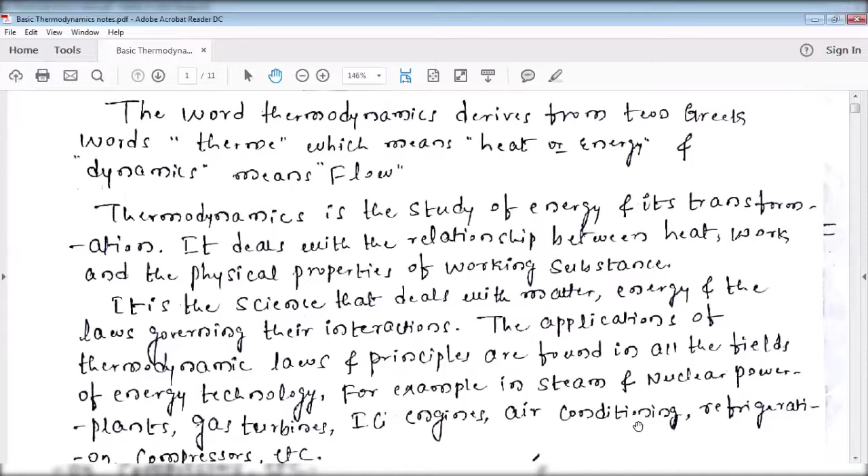In the air conditioning systems, what we are using is, here we are extracting the heat from the room to be cooled, then we are sending that heat to the atmosphere. Continuously we are extracting the heat from the room to be cooled and sending it to the atmosphere. Like this, by using thermodynamics in the air conditioning systems.

Then next example is refrigeration. In the refrigeration also, continuously we are extracting the heat from the substance to be cooled, that is inside the compartment, and that heat is sent into the atmosphere. Next is compressors. In the compressors also we are using thermodynamic systems.

Thermodynamic systems. These are the examples of thermodynamics. Many examples are there, many devices are there. All those devices come under thermodynamics. If you consider a boiler, that boiler comes under thermodynamics. That is one system.

If you consider a turbine, that is one system that comes under thermodynamics. It is a device which converts an available form of energy into mechanical energy. Again, that mechanical energy in turn gets converted into electrical energy. This is some introduction regarding thermodynamics.

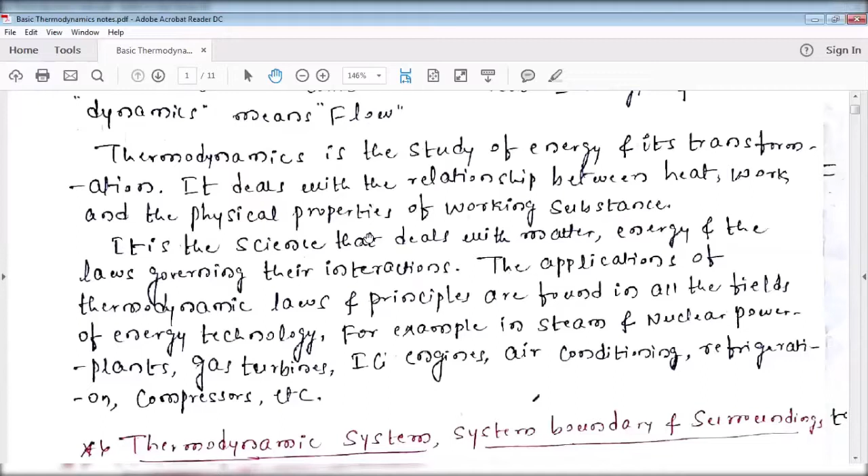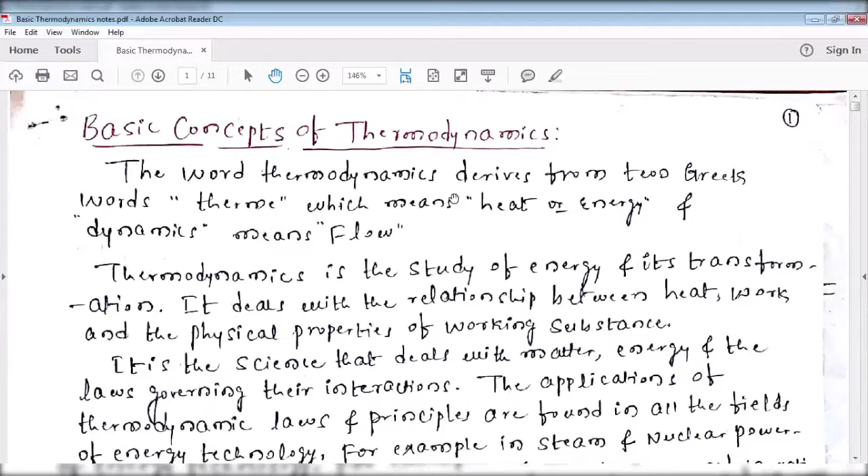In the examination, if they ask what is thermodynamics and to briefly explain it, we should write what thermodynamics is. Thermodynamics is divided into two words: one is therme and the second one is dynamics. Therme means heat or energy, and dynamics means flow. That energy flow or heat transfer is called thermodynamics. After that, write the applications of thermodynamics. I hope it's clear to you.

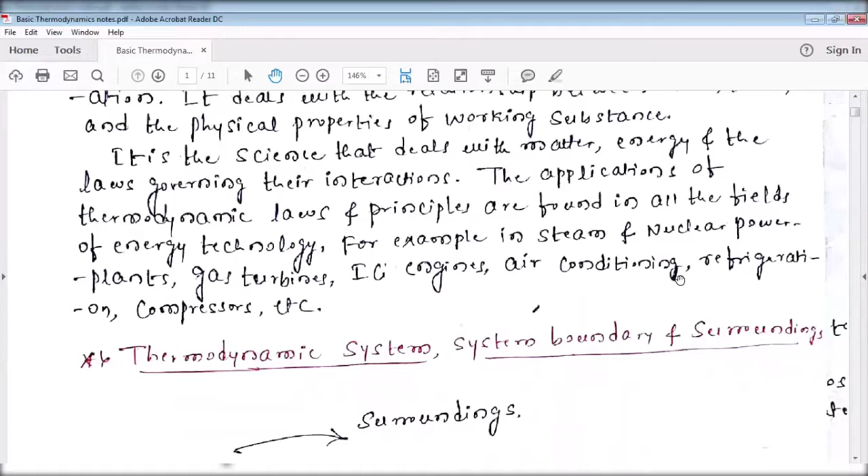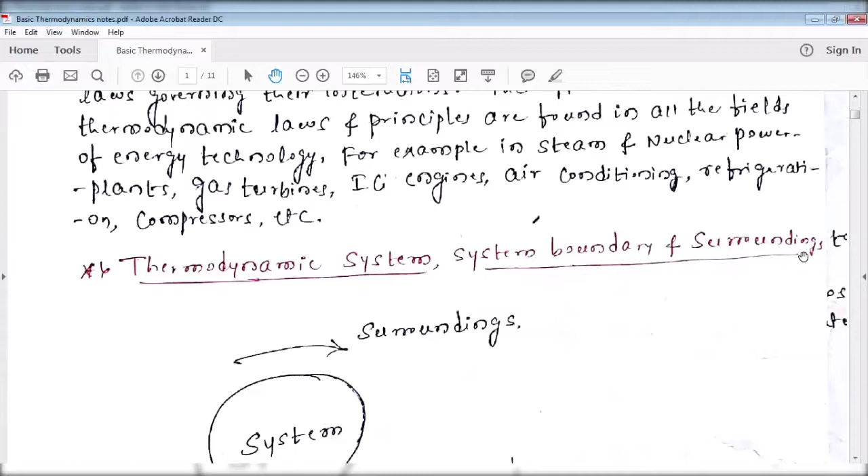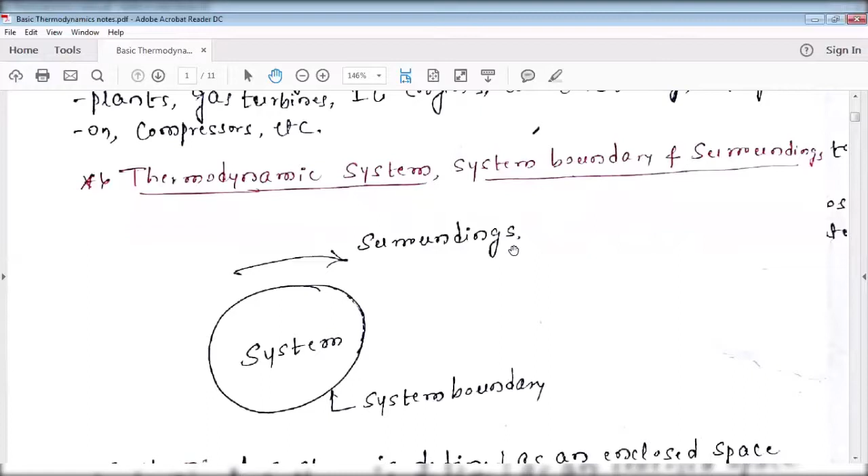Next is a very important topic: thermodynamic system, system boundary and surroundings. First, you should know what is a system, what is a system boundary, and what are surroundings. This is a very important concept, already studied in your first PUC. First, we are going to the system. Just go through the definition.

A system is defined as an enclosed space which has been separated for the purpose of analysis, observation, and inference. This is one system, an enclosed space separated for the purpose of analysis. If you want to do any analysis, observations, inference, or any research work in this space, you can perform it. Such a space is called a system.

The best example for a system is your IC engine. The IC engine is one system. Other examples are a refrigerator and an air conditioning system; each is one system. The next example is a boiler, that is one system. The next example is a turbine, that is one system.

Your mobile is one system. Your laptop is one system. Your classroom is one system. If you consider any device, that comes under one system. In your classroom, if I am using a projector, that projector is also one system. Understood? I hope it's clear to you.

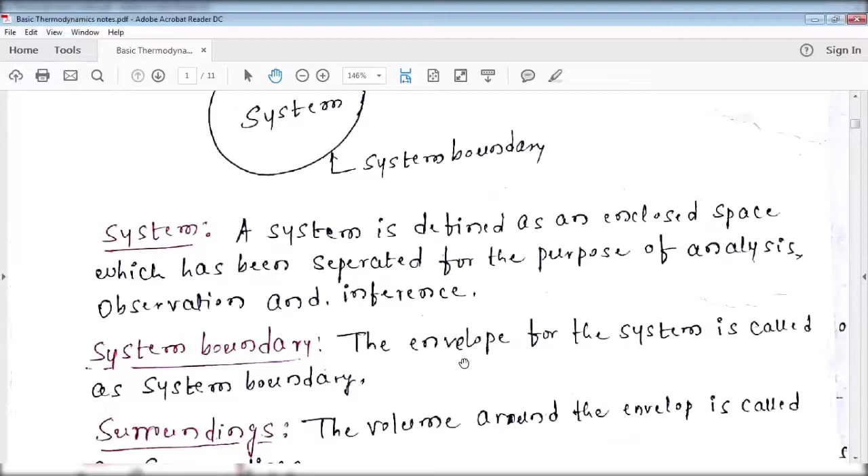Next is system boundary. Go through the definition. The envelope for the system is called the system boundary. Whatever the system is, that system is covered, and that covering envelope is called the system boundary. This is a system, the system is covered, and that cover is called the system boundary.

The best example for a system boundary is your mobile. For that mobile, you are using a cover for safety purposes. If the mobile is a system, whatever cover you are using is the system boundary. If you consider your laptop, you are using a cover for it. Here the laptop is a system, and that cover is the system boundary.

If your classroom is a system, four walls are there. Those four walls are the system boundary. If you consider your IC engine, the space inside the cylinder is the system, and the cover, that is the cylinder outer surface, is called the system boundary. I hope it's clear to you.

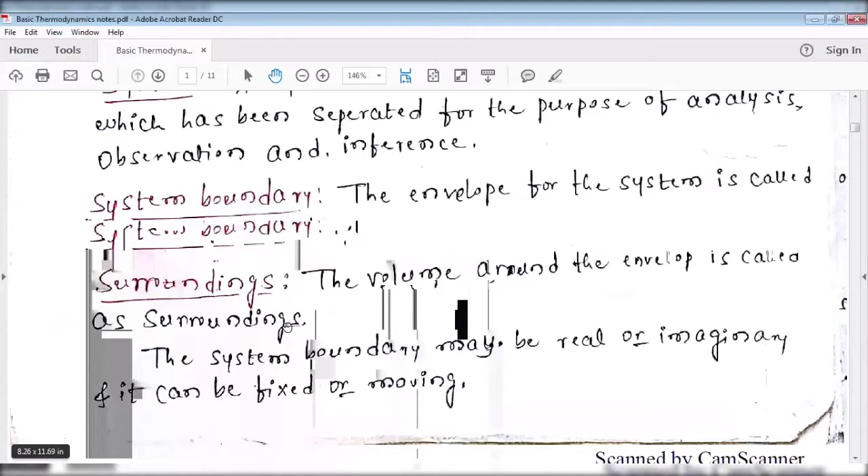Next is surroundings. This is very important. Go through the definition. The volume around the envelope is called the surroundings. Go through the figure here. This is the system. The system is covered by an envelope, called the system boundary. Whatever space is outside the system boundary, all that space is called the surroundings.

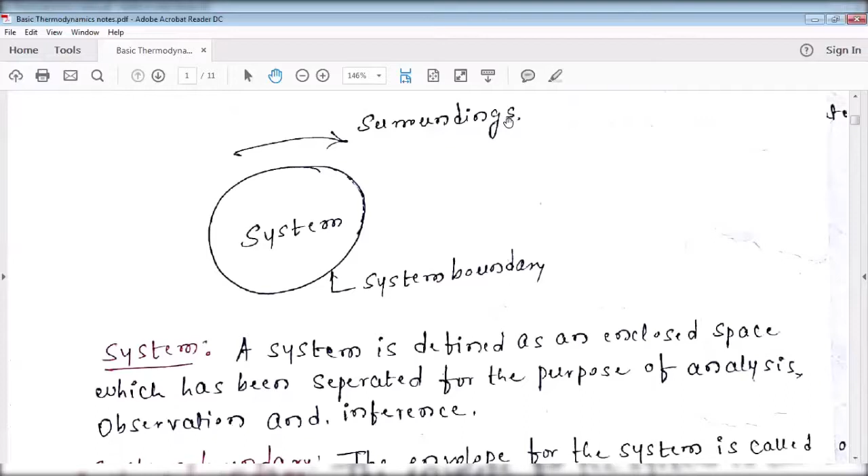If you consider your classroom as a system, that classroom is covered by four walls. Whatever space is there outside the four walls, all that space comes under the surroundings. If you consider your mobile as one system.

Yes, your mobile is covered by a cover, that is called a system boundary. Whatever the space is there outside the cover, all the space comes under the surroundings. Whatever it is, either 1 kilometer, 2 kilometer, 3 kilometer, 100 kilometer, that comes under the surroundings. Even though in the surroundings many devices are there, many equipments are there, all those come under the surroundings.

How to remember system, system boundary, and surroundings? Suppose you are staying in your hostel and you want to write a letter to your parents. What are you doing? First, you are writing that letter. Whatever the matter you want to express to your parents, you just write that matter on a paper. Whatever the matter you have written on that paper, that paper is called a system.

After completing the writing, you're placing that letter in the cover, right? That cover is called a system boundary. And whatever the space is there outside that cover, outside the envelope, that is called the surroundings. I hope it's clear to you.

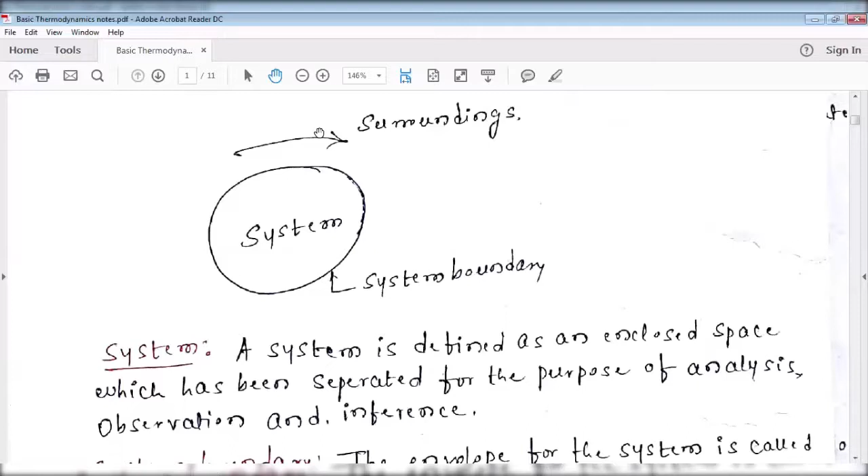And the best way to remember is, if you want to write a letter to your HOD, whatever things you are writing on a paper, that paper is a system. After completing the writing, you're placing it in the envelope. That envelope is a system boundary. And whatever the space is there outside the envelope, that is called surroundings.

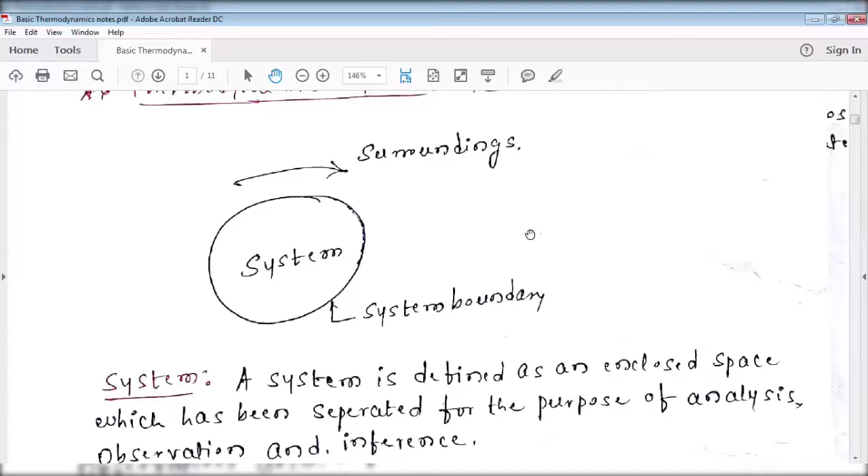And the best example for system, system boundary, and surroundings is our body. In many cases, our body is the best example for thermodynamics. Our body is one system. Our body is covered by skin. That skin is called a system boundary. And whatever the space is there outside the skin, all the space is called surroundings. Now it's understood to you: system, boundary, surroundings.

Next, we'll move to the next concept. The thermodynamic system can be classified into three types. First one is open system, second one is closed system, and third one is isolated system.

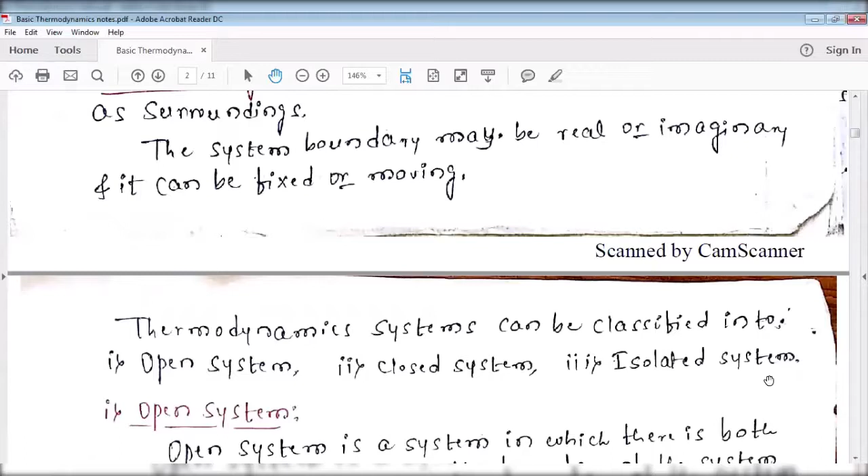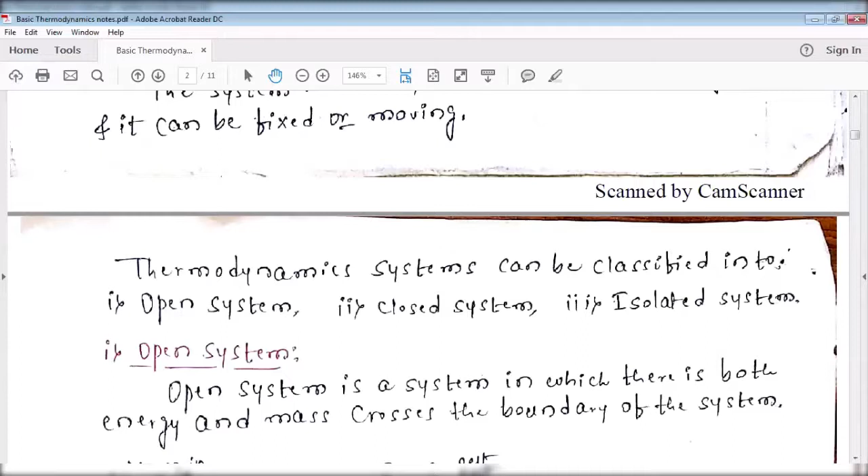What is an open system? An open system is a system in which both energy and mass cross the boundary of the system. Go through the definition again. An open system is a system in which both mass as well as energy cross the boundary of the system. Such systems are called open systems. The name itself shows open. Open means both mass as well as energy cross the boundary of the system.

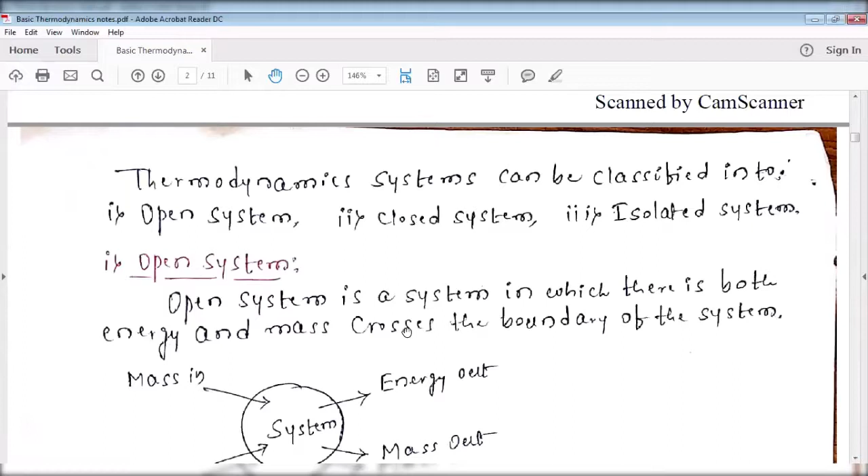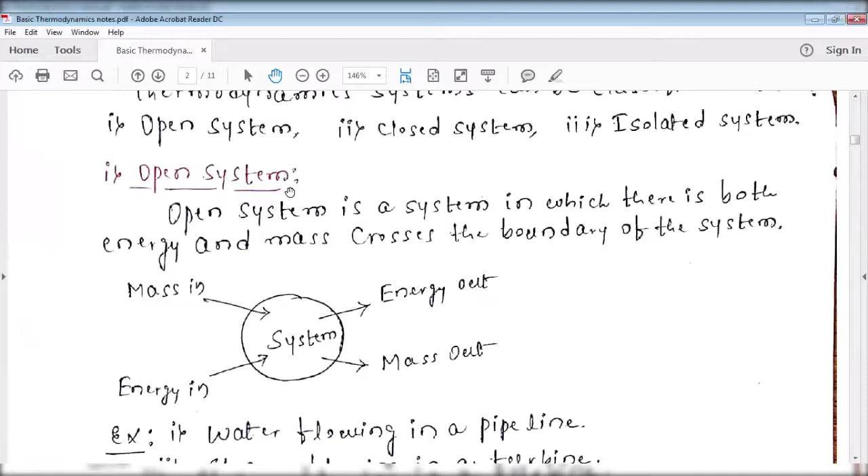You just go through the figure. This is a system. The system is covered by an envelope, that is called a system boundary. Whatever the space outside the system boundary is surroundings, right? If it is an open system, that system boundary is open. Once the system boundary is open, mass is entering from the surroundings to the system and energy is entering from the surroundings to the system, and also mass is coming out from the system to the surroundings and energy is going from the system to the surroundings. Such systems are called open systems.

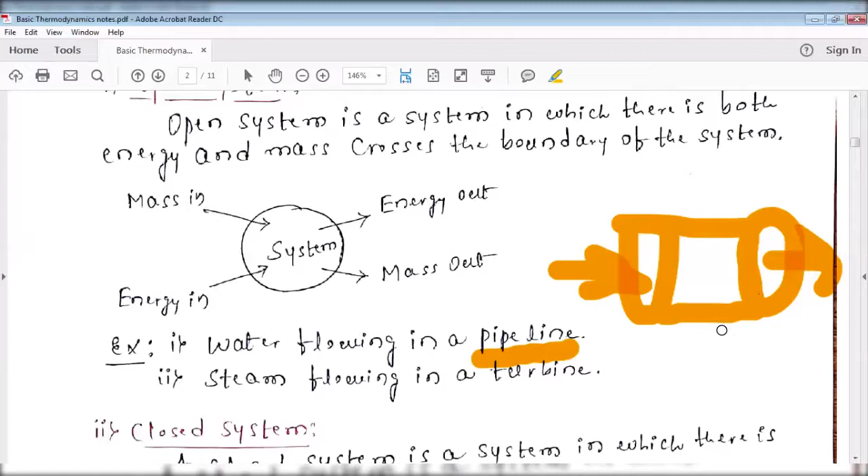Like that, here a pipeline is a system. Here the water enters from outside into the pipeline and also comes out from the pipeline to the outside. Yes, mass enters and along with the mass, energy also enters. That energy is nothing but kinetic energy. Such systems are called open systems.

And the best example is steam flowing in a turbine. Here the turbine is a system. Steam is having heat energy and also steam is having some mass flow rate. Both mass as well as heat energy enter into the turbine, and both mass as well as heat energy come out of the turbine.

Here the turbine is a system. Mass enters into the turbine and also heat energy enters into the turbine. Mass comes out of the turbine and also heat energy comes out of the turbine. Such systems are called open systems.

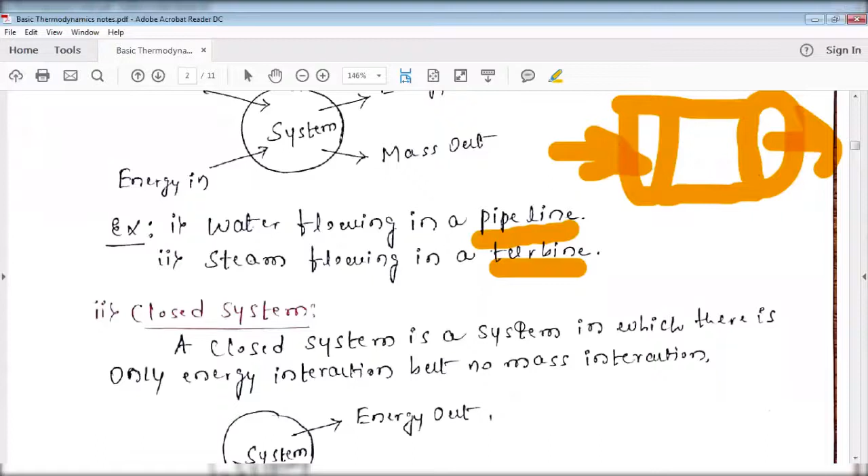And the best example for an open system is a fountain pen while writing. Whatever pen you are using for writing comes under an open system. Why is it an open system? When you start writing on the paper, ink is coming out from that pen. That is a mass. And that pen is moving with a certain velocity.

Your hand is moving with a certain velocity while writing. Yes, that pen is moving with a certain velocity. It is having kinetic energy. Both mass and kinetic energy are coming out. Such systems are called open systems.

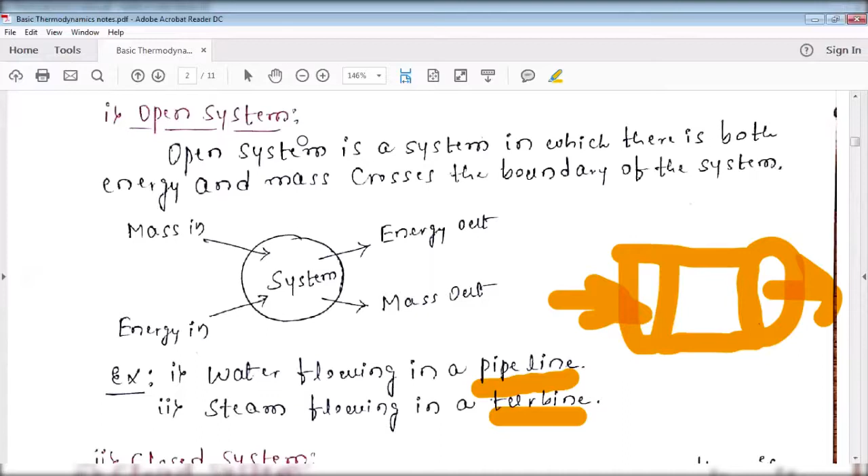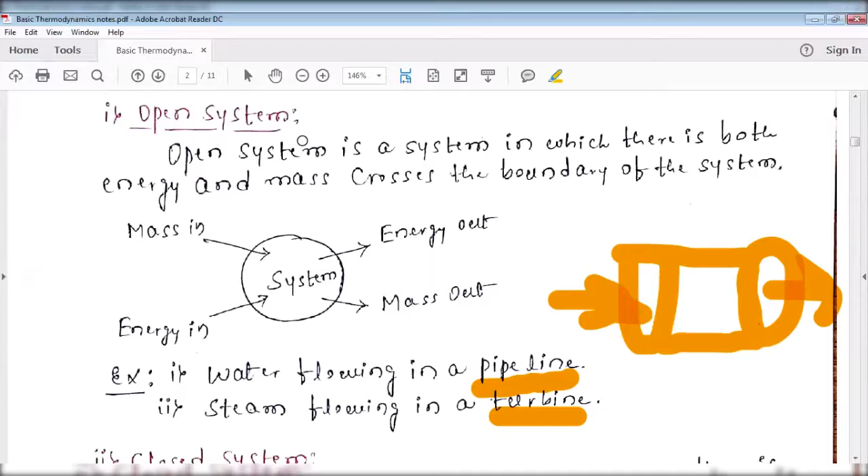Not only kinetic energy, whatever the energy is, either it might be potential energy, heat energy, or mechanical energy. Whatever the energy, if it crosses the system boundary from surroundings to system or from system to surroundings, such systems are called open systems.

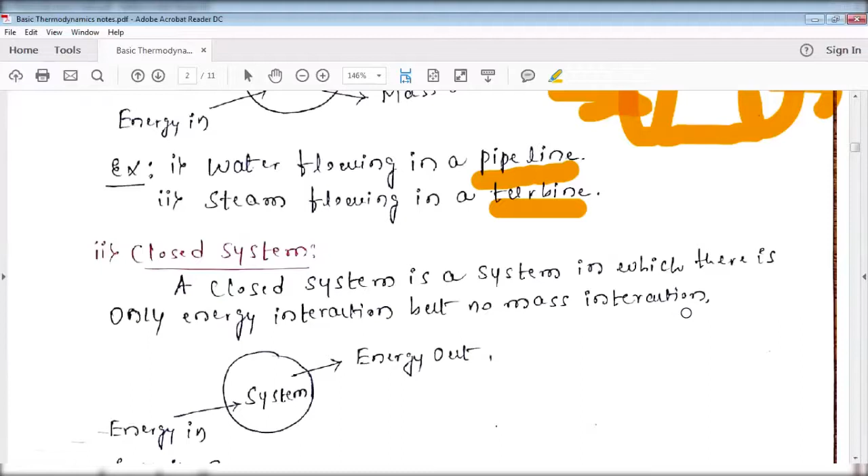Next is closed system. What is a closed system? Go through the definition. A closed system is a system in which there is only energy interaction but no mass interaction. What does it indicate? Closed. The name itself indicates the system is perfectly closed.

Once the system is perfectly closed, there is no space for mass to enter into the system from the surroundings, and there is no mass coming out from the system to the surroundings. But there is only energy interaction. Even though it is a closed system, there is a chance of energy interaction from system to surroundings or from surroundings to system. Such systems are called closed systems.

The best example for a closed system is a container. Assume that this is a container, right? Inside the container, water is there. This water temperature is around 100 degrees Celsius. This container is perfectly closed and is made up of metallic sheet, that is mild steel. Inside the container there is hot water around 100 degrees Celsius.

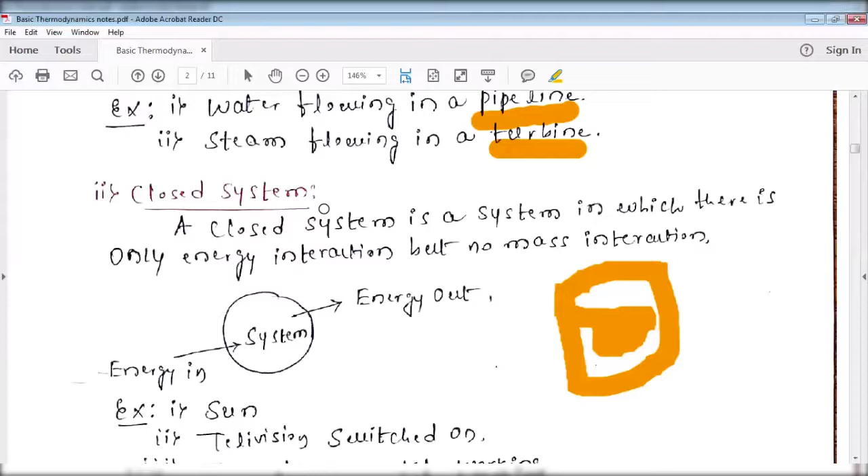Such systems are called closed systems. And the best example is the sun. If you consider the sun, it is continuously emitting heat energy to the earth's surface, but the sun stays in the same position. There is no change of position. The sun is only emitting heat energy. There is no mass interaction between the sun and the earth, only an energy interaction, heat energy, between the sun and the earth's surface.

Such systems come under closed system. And the best example is a television while operating. Your television is fixed on the wall in a particular position, but you are using a remote to operate the television. There is only an energy interaction between the television and the remote, but no mass interaction between the television and the remote. Such systems come under closed system. If there is only energy interaction, that is a closed system. If there is both energy and mass interaction, that is an open system.

The next best example is a transformer while working. Many of you have seen the transformer on the road. The transformer is placed in a fixed position; it is not moving. But there is an energy transfer, electrical energy transfer, from the transformer to different places. We are getting electrical energy to the individual house from the transformer. There is an energy interaction from the transformer to the house, but there is no mass interaction. The transformer is not moving from that place to your house. Such systems are called closed systems.

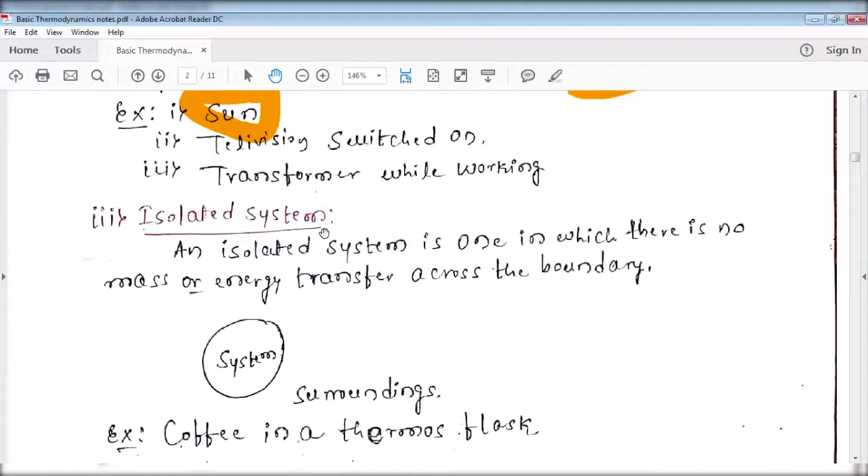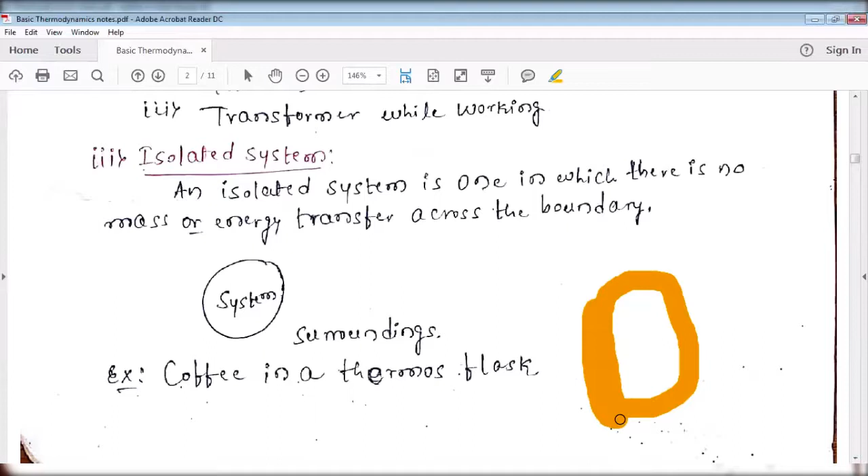The best example for an isolated system is coffee in a thermos flask. Just observe here. Assume that this is a thermos flask. This is perfectly closed, and I'll draw another layer; this is perfectly insulated. Inside the perfectly closed and perfectly insulated container, hot coffee is there. Assume the hot coffee temperature is around 90 degrees Celsius, and the atmospheric temperature is 28 to 30 degrees Celsius.

Even though there is a temperature difference between the hot coffee and the atmosphere, there is no chance to transfer the heat, because it is perfectly insulated. And there is no chance to transfer the coffee from the container to the atmosphere, or any substance from outside into the thermos flask, because it is perfectly closed. Such systems are called isolated systems.